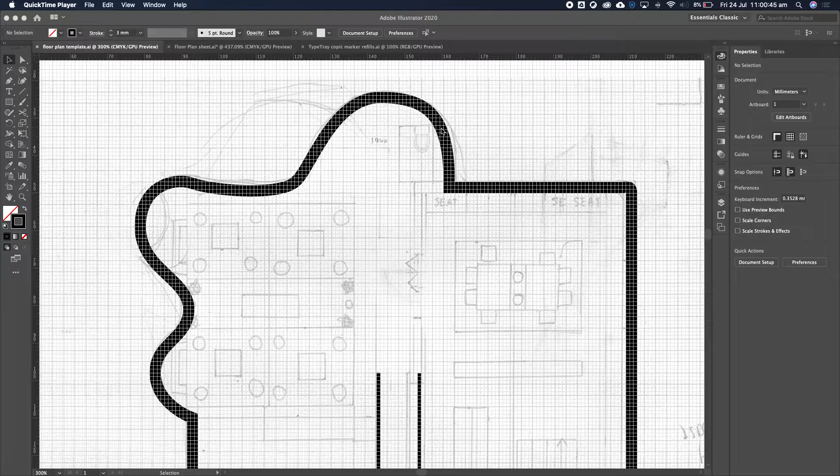Okay, so here we have our file from last lesson, and we're going to select this with the selection tool, double click on it to make a copy, making sure that the horizontal and vertical is 0, and click on copy. Next up, you go to Object, then Path, then Outline Stroke. I'm going to change the color of this now to a green color.

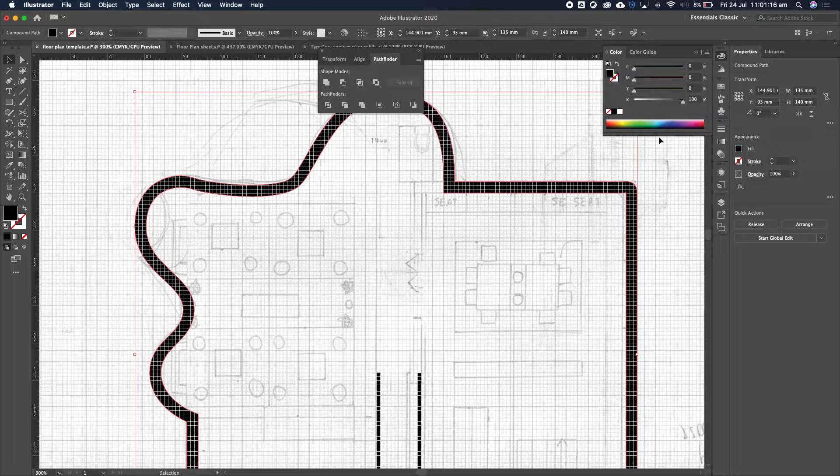Okay, so now we need to cut this window out from all the other structure. So what we're going to do now is deselect all this, and change the color over to a blue color.

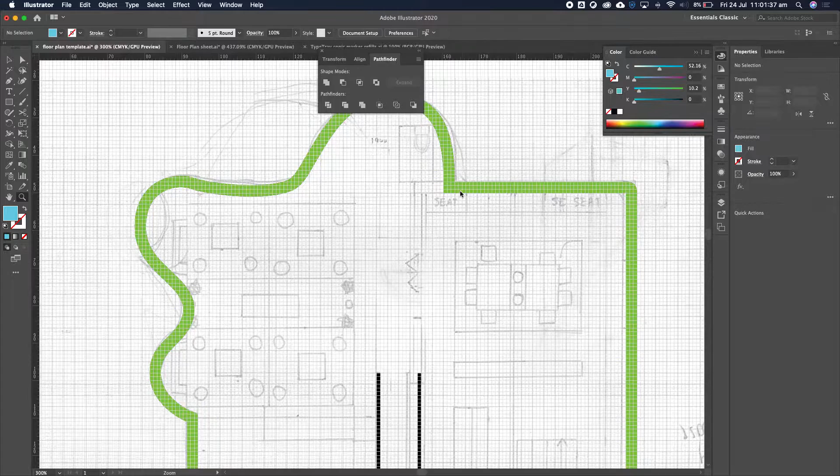And we're going to use a rectangle to cut this window. So I'll go to the rectangle tool, and cut the window in this spot here, and also further on here. This object is on top of this object here. All right, so we want to cut it now.

So if we go to Window and open up Pathfinder, we get the Pathfinder tool. If I select both the rectangle as well as the green shape, and go to Minus Front, I cut that window, which is really cool.

I go over to the other side now, to this side here. This item here is over top of that. So what I want to do is click on it, press Command Shift, close square bracket, to bring to the front, press Shift, click on the green, and then go to Minus Front.

I deselect it all. I go to the direct selection tool, and click just once on the green shape on this side here, which I want to delete. So now if I press Command 0, I can see all this happening here. So if I zoom in right here, I've got this shape right here.

So what I want to do now is duplicate this shape again, and I'm going to double click on this, making sure that my horizontal and vertical is set to 0. I'm going to copy this shape, and change the shape color over to purple now.

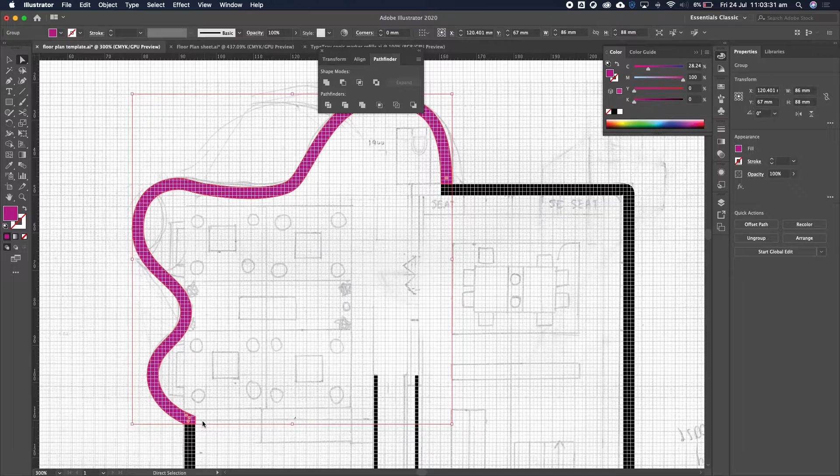I'm just going to zoom in so you can see this a little bit better. Now go to the direct selection tool. I'm going to click on the edge of the purple, click on just this node there, and press delete. Okay, and then I'm going to go over to the other side.

I'm going to click on the edge, click on this node here, press delete again. So now all I'm left with is just the outer line. I'm going to change this around so that it is a purple stroke. There is some purple stroke left on this side here, so I'm just going to select that and delete it. So I'm now left with just that outer side.

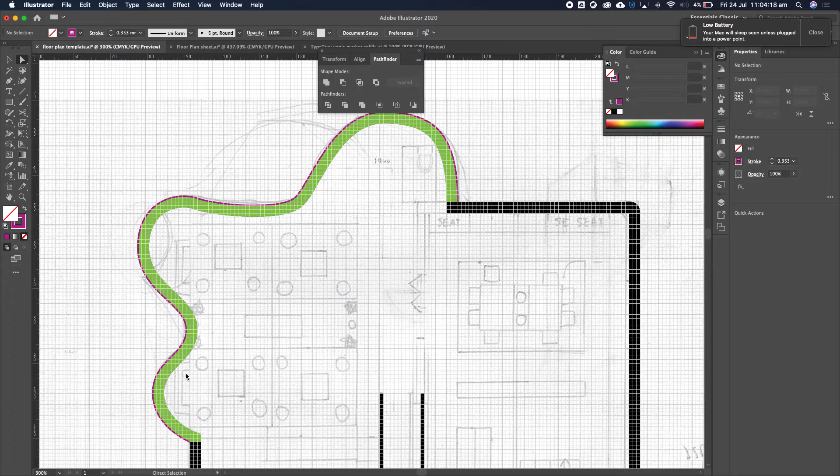What I'll need to do now is make my center line. So if I select the purple line, and go to Object, Path, Offset Path, and type in 1.5, let's click on Preview. So you see here with 1.5, I have a nice center line inside here.

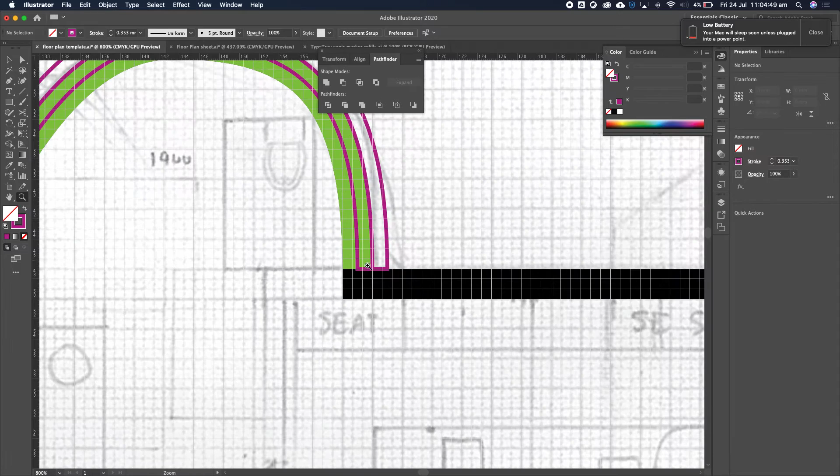I click OK. Right, so we have an extra line outside. So what we do now is zoom in here, zoom right in, and select the edge, select that node there, press delete, go right over on the other side, right over to this side here, select the edge, select that node, press delete as well.

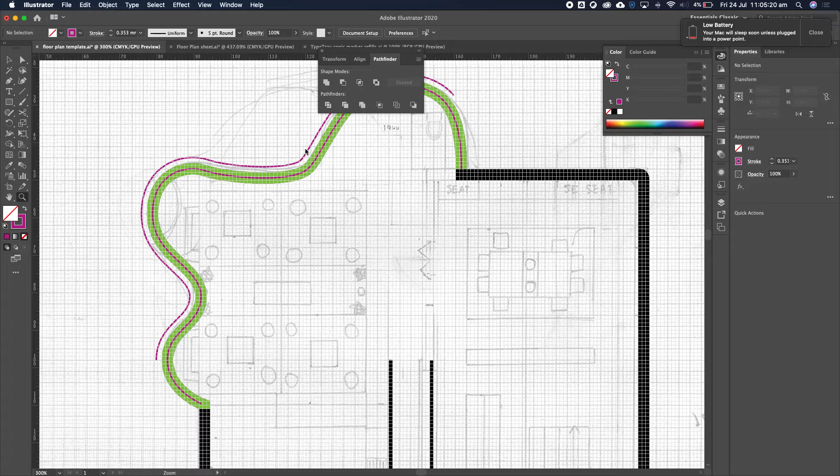Okay, and I'm also going to select this outer line, and press delete a few times. So now all I'm left with is this shape here. I've still got some path there to get rid of, so with the direct selection tool, click on that and delete a few times. So now I'm left with this purple line here.

I change that purple over to black. Black. So that's all set and done.

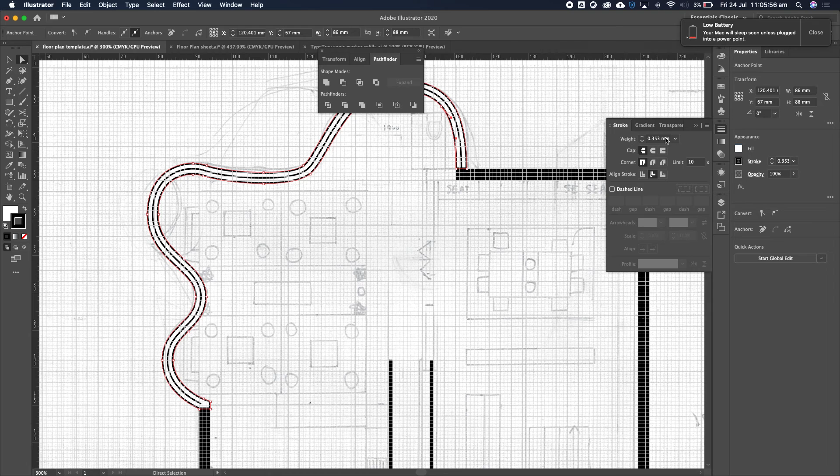And I now change this green shape over to the default color, white and black, and change my stroke so that the stroke is internal. And that there is our curvy wall, a curvy glass wall, which is cool. You need to adjust the thickness of the stroke to the specifications though. And that is it. Thank you.